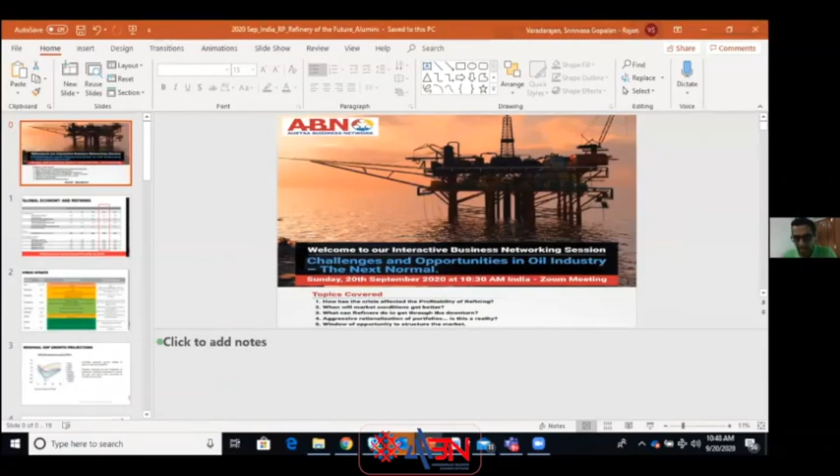Correct. Okay, first of all, thank you very much. In fact, very kind words, Gopi, and I never thought I would be introduced like this, because when I gave my profile, there are many things which got added, and also which I don't know whether I deserve or whatever it is. But I said yes, I will do this because people told me this is an interactive session, in the sense everybody is going to contribute, and being in this industry, I can only let you know what's going on right now, what I know about it, or to the best of our knowledge.

So it's a very limited knowledge sharing from my side, and I want everyone to ask questions during the Q&A and put their views also. This is especially when it comes to the challenges and opportunities, you have to view these things in a larger perspective, in an overall gamut of things. Maybe I have approached this in a very narrow perspective of a technology, but I'm sure Baliga, coming from the industry, expect him to put the operators' or operating units' constraints, their challenges, and where he sees challenges and opportunities. So with that, let me start.

And first of all, thank you very much to all the audience. I never expected, even in my own company, if I call for a meeting, hardly 5% attend the call, especially on a topic like this, because it is talking about the future, and it all depends on how one is going to view the crystal ball. And the crystal ball can be different from individual to individual, but I'm really amazed to see so many people, especially even not connected with the alma mater, like Venkatesan, Kalaimani, Anand, and many others. I'm immensely pleased, they are my good friends in the industry, and I'm extremely pleased that they want to stay connected with the industry, and in particular with the university we all come from. So thank you very much.

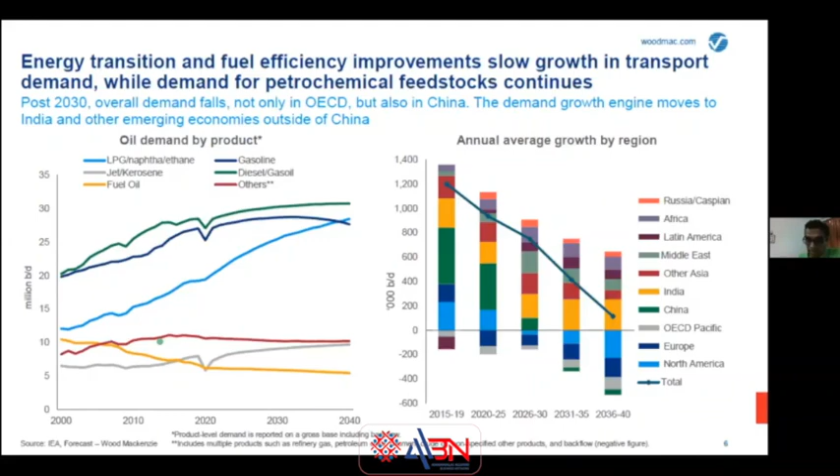There was always an emphasis when the organizers wanted to talk about what is the situation now, how did it affect, how is corona going to play a role. When I looked around the world, I found some consultants speaking that yes, there is an effect which is going to make on the capacity utilization, especially in almost the developing world like India, China, in those countries.

There are going to be a lot of restrictions in capacity utilization, because we are not an industry where we can produce and store. We have limited storage, and India has done a lot more effort on its storage capacities when it comes to crude as well as petroleum products, but still there is an optimum capacity which we can store, beyond which we will only be locking our money in, like putting gold into a locker. So whether we can afford to do it, yes, we can if we are rich, but if you are not rich, you are not going to buy gold and put it in the locker.

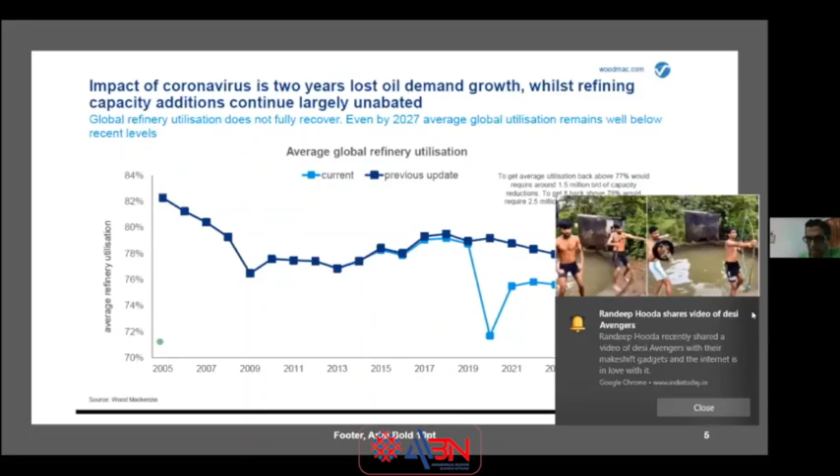Similarly, with the same analogy, the capacities of the refineries have to be restricted, and it is going to be restricted. It is going to be, in the future also, not as efficient as it used to be in the previous years, like 80% or 85%.

You all know, most probably in the refining industry, if the capacity utilization is less than 90%, we are not going to even make break even, because for both our products and the crude, we have to put a lot more money.

Just to quote one of my previous experiences, when I used to work for the public sector in India, my director of finance used to say, you guys can shut down the refinery, I can make money by buying crude and selling and making products by trading. So that is the situation, honestly, guys.

Maybe it is very difficult for engineers to digest that type of statement. When I used to be a young engineer, I used to challenge him on why it is so. But it is a fact, because a lot more money is available in trading, in hedging, in taking calculated risks. And from a technology or engineer's perspective, I feel if the refiners cannot use their capacity to the full extent, it's very difficult for them to make money.

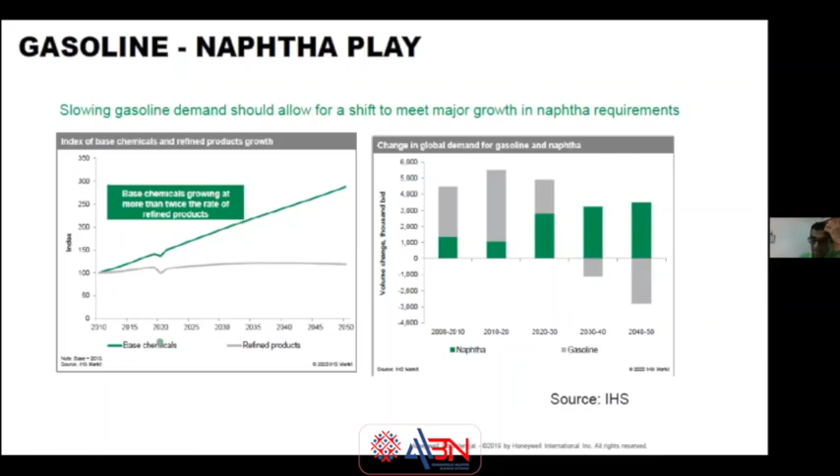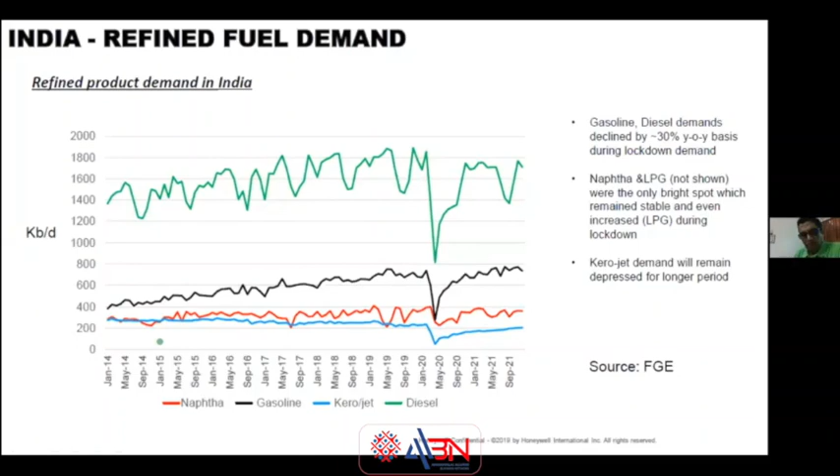And again, there can be seasonal fluctuations and changes in demand, especially for diesel, which is the driving force in most of the refining today. Next comes kero-jet, which is likely to get to normal levels only by next year, not immediately. So the recovery path, especially for a key product like diesel, is going to take a little bit of time, and this is what we expect to happen in the next few months.

If you look at the capacity, as I mentioned, for a good refinery it's always better to be above 100%, because then the profits or margins can really go up, since energy is one of the main requirements in the refining business. If you operate at low capacities, your per capita energy cost is going to be high. So operating at higher capacities is always better, and that's why we always push our refineries to maximum capacity.

But that took a big hit. Capacity utilization came down as low as 70% during the COVID situation, especially immediately after the lockdown. Because we also had very high inventory of products, we could not sustain continuous production in the refining industry, and it took a big hit. In fact, many refineries went on shutdown, except a few, and then slowly recovered. I think currently most of them, on average, are at about 80-85% capacity utilization, including the big private sector refineries like Reliance, Nayara, and others.

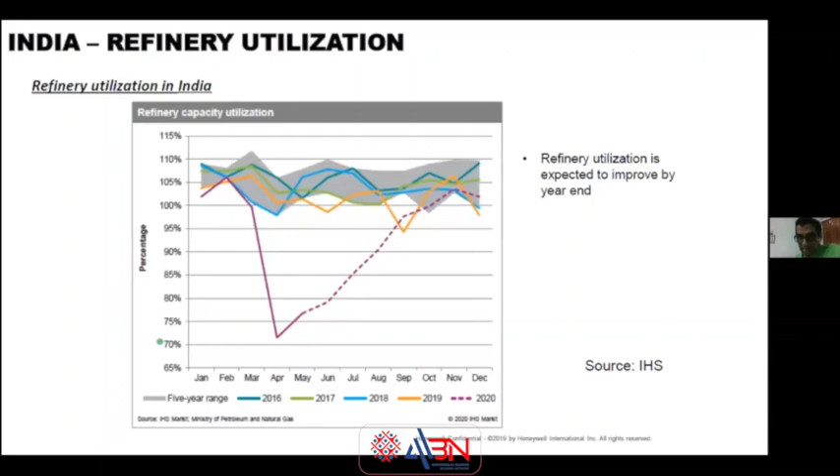So on an average, we are about 80-85% utilization, but still a long way to go. It's not enough for us to make the money we would like to see.

Here's the trend on the spread. For most friends in the industry or from other industries, spread is a common traders' terminology—that is, what is the margin or money one is going to make between producing certain products, especially in refining. It's mostly a traders' terminology, the spread or the crack, as they call it.

For most refiners, the diesel crack is very, very critical. If the diesel crack is not high, then the profitability of operating the refinery will not be that good. So we always face constraints on the cracks, because in 2014 the diesel crack used to be 18, 20 like that.

When it gradually came down, COVID brought nearly a negative crack in some refineries, and on average it came to $3. Just imagine, from $20 to $3—it's a very big drop, and the industry was suffering as to how they can make this up.

It continues to be a challenge for the industry. Because of this trend, and also because demand is coming down, the industry has to look into new avenues to make themselves more economical, because it cannot sustain on the previous cracks.

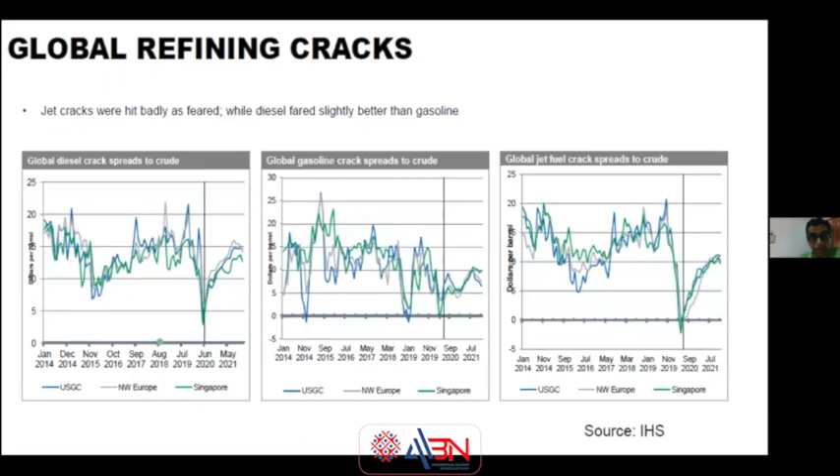Now, I don't know from a timing perspective—maybe I'm taking too much time—so I'll quickly pass through some of the petrochemical demands. Petrochemicals can be classified as aromatics-based or olefin-based, because those are the building blocks for the various petrochemicals that have to be manufactured.

If you look at paraxylene especially, which is one of the products most refiners or petrochemical companies make, the growth rate shown in red is strong—about 6% for a country like India—whereas production capacity is growing only at 2%. So when my colleague Rajaraman talks, he'll discuss new technologies and how we can bridge this gap between capacity and the growth or demand that's there.

From a segmental analysis, these are all going at a very good rate—like 7% for filament, and about 9% growth rate expected for resins. So this is very healthy demand, especially in a country like India, and there are a lot of opportunities here when it comes to paraxylene.

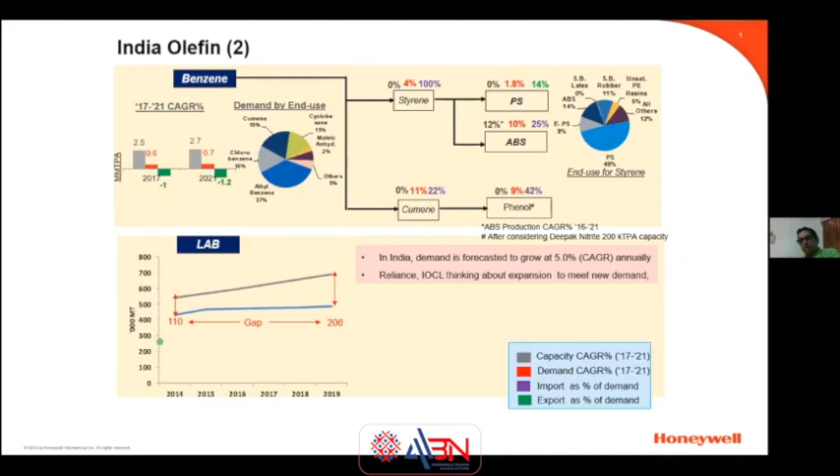Going further, there is some requirement for butadiene as well, and its growth is also projected in the range of about 6 to 10%.

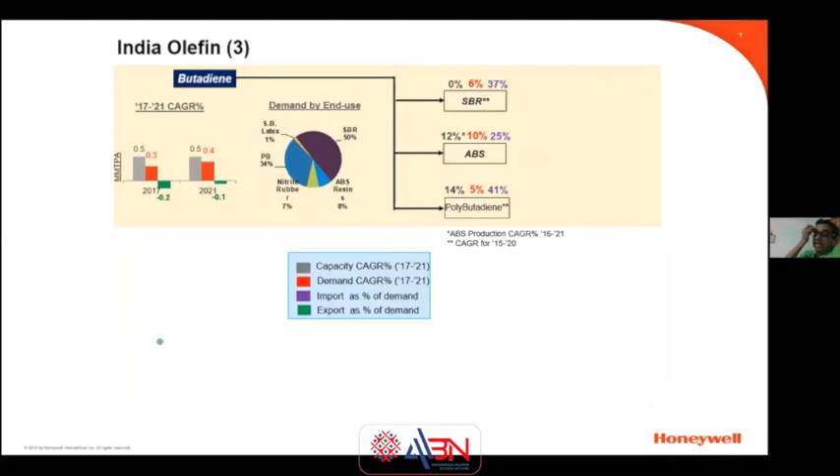In the future, with all this petrochemical growth in India, the question is whether refiners can afford to stay with the conventional products they used to make. The answer is definitely no, unless regional economics permit you, or you have to think of new facilities to be more chemical or petrochemical manufacturers than conventional fuel producers.

In this regard, the industry is moving in 3 steps, like in the computer world where you had a first generation, second generation, third. The economists or investors are thinking of bringing in three phases. One is the first generation, which is the current level.

For example, some refiners have a petrochemical plant like a cracker attached, but they are not converting all the fuels into chemicals. They hardly do - 5% in some places, 10% in others, but it can easily go to 20% with units like FCC producing more propylene or olefins rather than just diesel. Even today, the best highly integrated refinery can make about 10 to 15%.

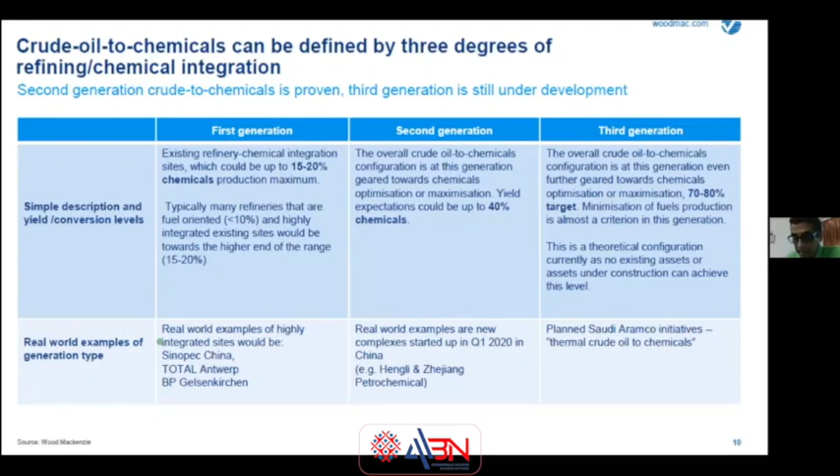In that refinery, most of the fuels will be converted into petrochemical products. The industry is also thinking that even 40% may not be adequate, so we may have to go to 80% level, and that is what majors like Aramco and others are planning - to take the refinery from conventional fuel producers to chemical producers.

So this is the flow sheet of how refineries are likely to change. It's not going to be the conventional crude unit followed by desulfurizers, hydrocrackers, and FCC units - it's going to be a lot more extensive. When you need all the hydrocarbons converted into petrochemical products, you need to invest more in units to make aromatics and also olefins.

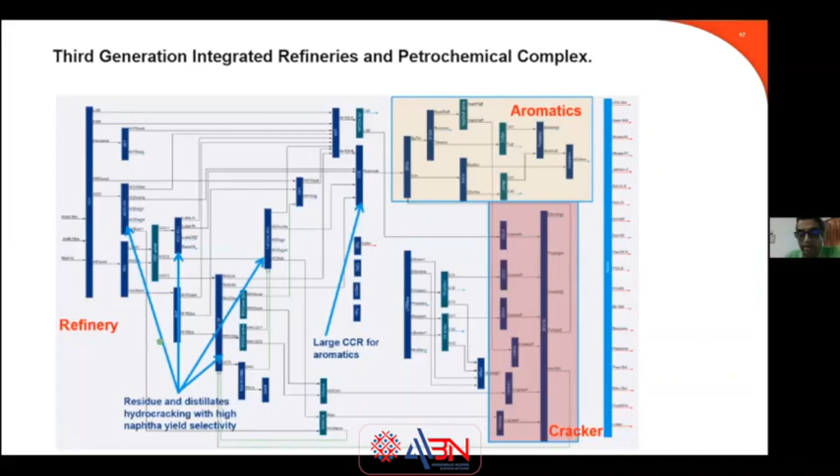So the product slates in the refineries have to go up much differently than what it is now. So how do we do this? Can only new refineries start with this? My view, or the industry view, is not that, but unfortunately in India this has not taken up much, as it is very well demonstrated in other places like Thailand, the Far East, and other countries. 30 years ago, I know one of my CEOs very much insisted on the Manali industry belt, for example, but unfortunately those things have not gone through.

Sorry about this disruption. I think you can switch your windows, sir. Yeah.

I want to remember Mr. V.R. Deenadayalu, who was the chairman of MRL. He wanted to bring in the concept of the Manali Industrial Belt, where you share the synergies between the industry. More of this is going to come in the industry, and I want the industry to take a lead in making the synergies available and convert the refineries into more of petrochemical complexes rather than just be refineries.

Maybe I will have, this is a good time. Maybe I'm talking too much. That is why there is a natural break, and I can give it to my colleague who will talk mostly about the new processes or new technologies available to improve the refineries' profitability. How about that?

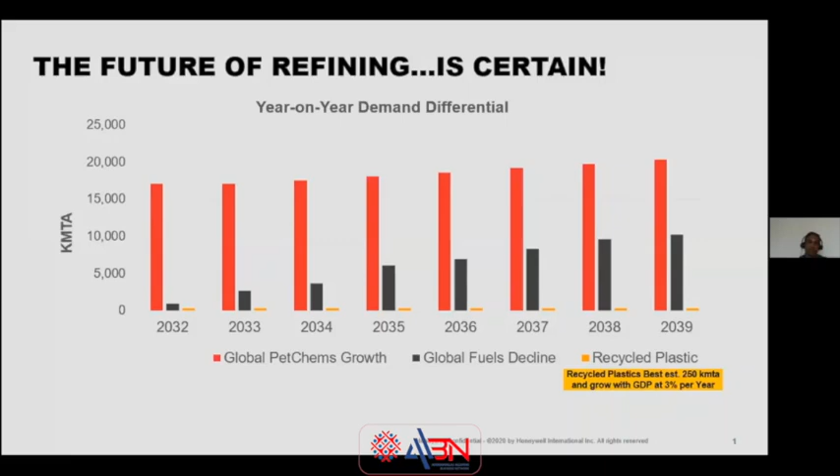Earlier, Mr. Rajan pointed out the first generation, second generation, third generation capability. I'm touching upon that in a pictorial form. Previous refineries concentrated mainly on transportation fuels, making gasoline, diesel, and jet, with petrochemical complexes adjacent to refineries as a kind of separate industry. As the petrochemicals industry grew and pressure on margins increased, nowadays people talk about refinery and petrochemical complex integration, which is happening to a small extent, with some shift towards gasoline or diesel shifting to petrochemicals, with new complexes and FCC units making higher propylene.

If you look at yesteryear's refineries, they hardly made any petrochemicals. Today, even the best integrated petrochemical units don't have more than 10 or 15% petrochemical portfolio compared to what is actually needed. In the future, we expect people to move closer to zero fuels, driven also by increasing environmental pressures, and people will look for higher capital efficiency than was achieved before. These are the changing trends from first generation to second generation to third generation. Let's see how technology plays a major role in each development, and how we can monetize existing assets while moving through the various stages of development.

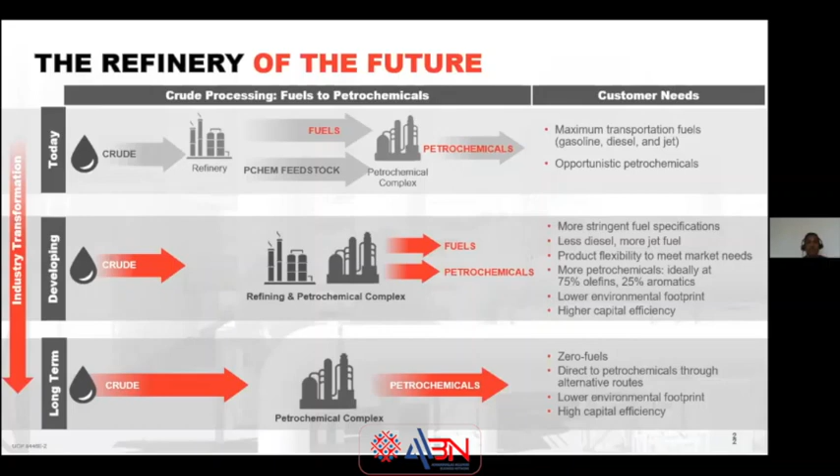Now, the refinery of the future has to be flexible, especially with respect to shifting between gasoline and diesel. There's no way a refinery can simply be said to maximize diesel or maximize gasoline. It has to have the capability to meet changing product mix and changing feedstock preparation for downstream petrochemicals. Integration with petrochemicals is a given, no longer optional for the refinery. As we know, even on a Sunday with more than 143 participants connected from home, that shows the future direction. The refinery will move towards a lot of digitization, advanced technologies, advanced monitoring, remote monitoring, etc. All these things will be the future, if you really want to maximize and monetize every hydrocarbon molecule coming in.

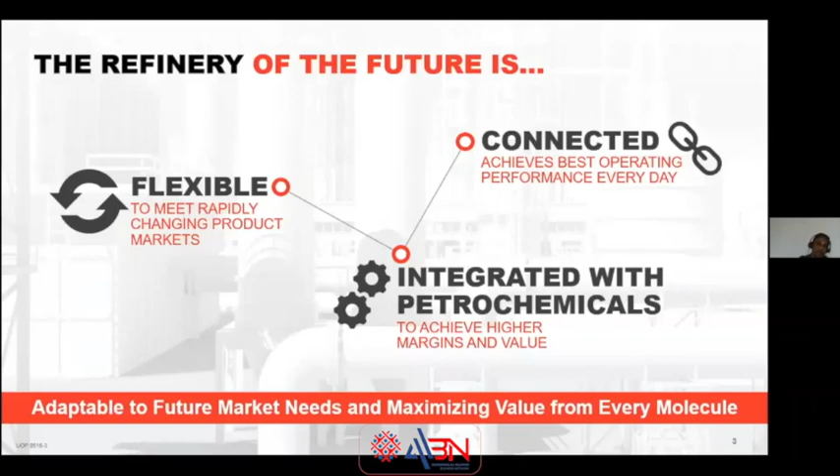Now, let us take through the existing assets and how one can monetize it. This is a simple refinery generally people have, and there are certain changes to some of these configurations could be there as per the existing refineries.

This is a generic flow diagram where people used to have a bottom of the conversion, mostly a delayed coking unit. There will be an FCC. Some places there will be a hydrocracker, depending on that. I have chosen here to represent the FCC, as already in India we started moving towards making propylene from FCC to meet the growing propylene demand. Now, naphtha complexes are there, mostly making now towards the Euro 5 gasoline and other specifications.

Now, what is going to happen in future is we can add some of these technologies, what I am showing now coming up on the screen. I will briefly describe the purposes of it, not in greater detail, in view of the time, as well as to have the entire audience covered.

Now, let us see the kerocracking, which is a low pressure cracking of the kerosene stream, converting it to valuable naphtha for either the naphtha complex or future petrochemical purposes, and also to make more LPG. Similarly, hydrocracking of the diesel is going to come. These two, if you really see, are aimed towards shrinking the fuel component, either the gasoline or the diesel.

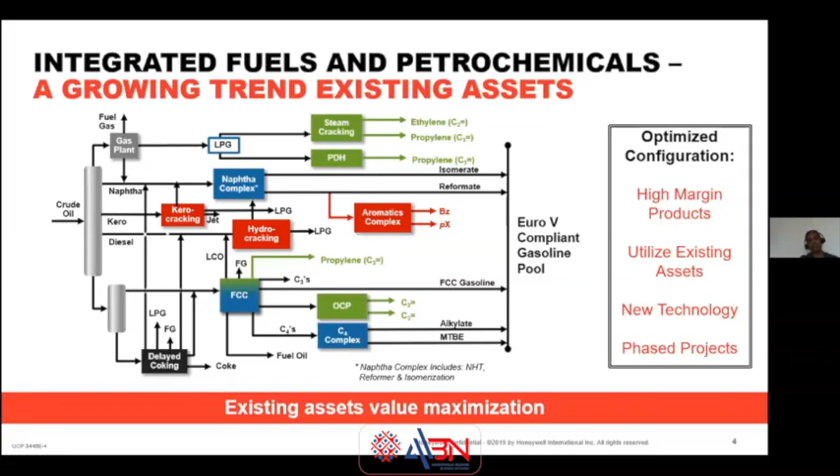Now let me move from the only pure fuels. This has helped create some high margins, and we can implement all these things in a phased manner, so that capital efficiency can be achieved by putting a small addition, either the OCP technology or using small hydrocracking to maximize the naphtha, LPG, diesel, or jets. And of course, the PDH and steam cracking has got a larger investment compared to the others.

Now let us go to the integrated complexes that are coming in. If you see here, we talk about the same complexes, but with some bottom of the barrel upgradations expected to come, either the Uniflex or other technologies that help in maximizing the conversion of the bottom of the barrel. Because now the heavy crude to light crude differential has come down, but there could be future incentive to process heavy crude. With crude demand also going to narrow down with utilization of fuels generation or petrochemicals generation, the bottom of the barrel conversions one has to evaluate. But these are the things likely to add as a kind of total complex, converting everything to naphtha or suitable for going to a cracker complex.

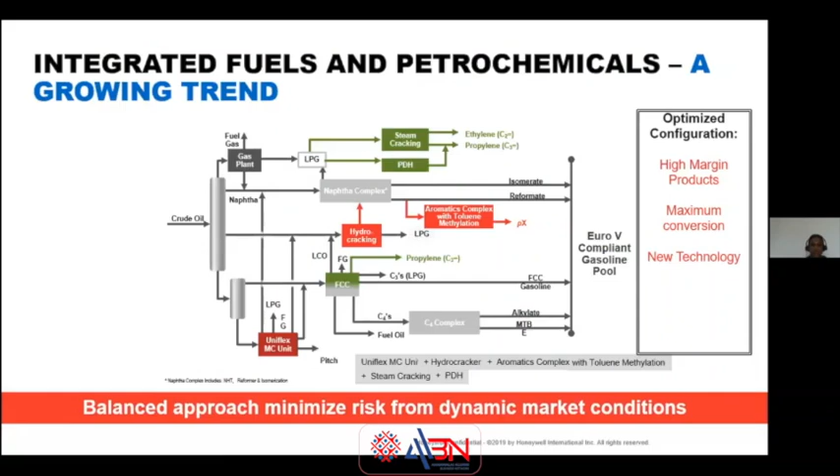Now there is an additional technology available in the aromatics complex, called toluene methylation, converting toluene further to PX and maximizing PX production. So the entire complex, as you see in the previous slides, this is maximizing the olefins and the aromatics.

Now this is what is going to be the total elimination of fuels in future, as you see, and every complex's molecules have been converted to maximize the petrochemical feedstock or the building blocks.

I will just take you to the topmost portion of the naphtha, where the MaxEne unit has been put. The MaxEne unit is essentially a separation of the naphtha with respect to its hydrocarbon nature. Paraffins are basically separated, and the normal paraffins, which are a very good component for the steam cracker to crack, are preferentially sent to the steam cracker to maximize the yield of ethylene and propylene. Similarly, MaxEne rejects, which is the concentration of aromatics, will be a very good feedstock for the platforming unit, which can go for aromatics generation in downstream aromatics complexes.

And whatever be the gas plant, which is a combined saturation gas plant, separates the C3 and C4s, they can go to an on-purpose propylene unit, called the propylene dehydrogenation unit, to maximize propylene.

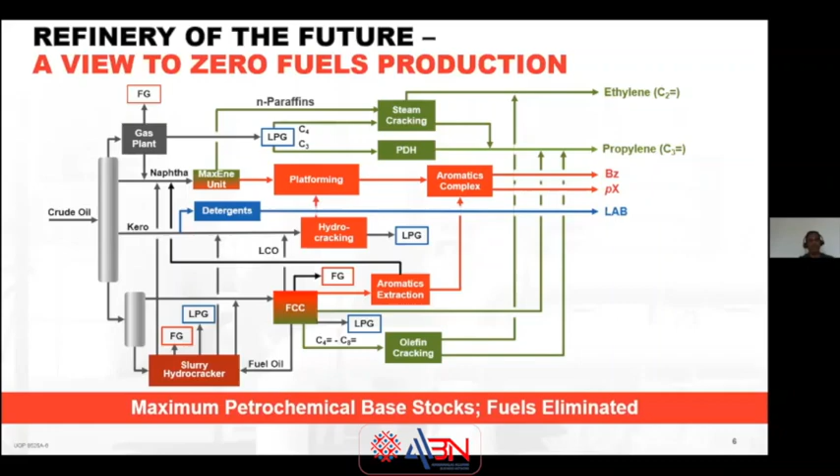Now we talked about the various elements of the technology and how this technology is also going to be made in a kind of a sustainable balancing act. If you look at this diagram, moving from the climatic concern on the right hand side, we are already seeing fuel efficiency needed because of electric vehicles and other things. The pressures on fuels, the renewables have started replacing some fossil fuels. And because of other technologies like car pooling with Uber and Ola, there is a lower fuel growth expected, which is going to put pressure on fuel growth.

If you turn anti-clockwise, everybody expects GDP to increase, and that is what is expected to grow. With that, the standard of living is going to go up, and use of petrochemicals or plastic usage is going to grow. Then there is a rising demand for petrochemicals, which makes us think the petrochemicals demand is going to push, and we take the shrinkage of fuels as discussed in our first slide, and utilize that to capture value by moving to petrochemicals.

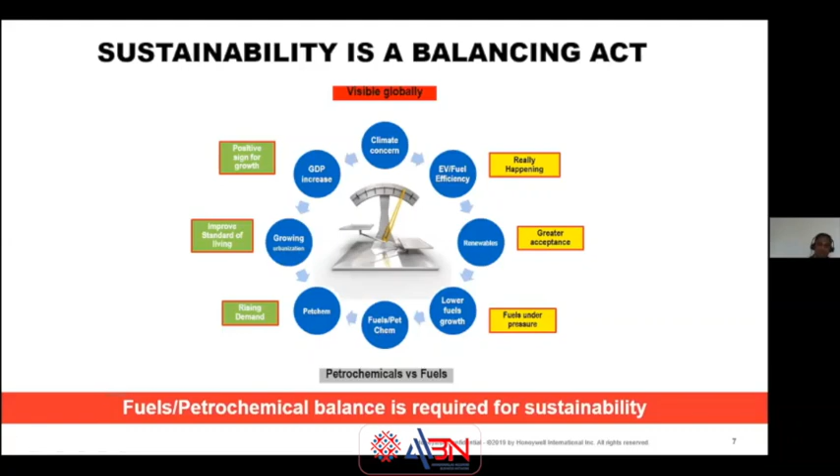Now this is the third and ultimate generation being planned with all the elements of petrochemicals downstream. As you can see, LLDPE, polypropylene, butadiene, PX and benzene, and all kinds of complex situations have been added here. This is the final configuration being worked out with the customers. It is on the drawing table, and hopefully this is what some companies will start moving on in the coming years.

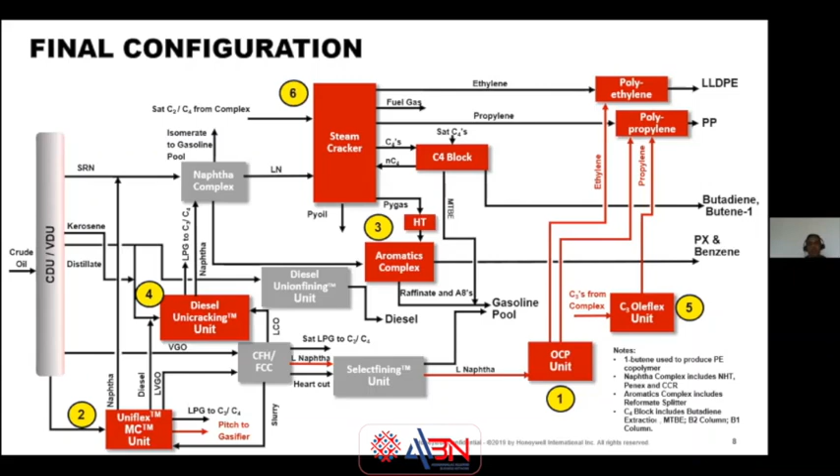Some of the units we touched upon can be added even today, and these are all going to be evergreen even going forward into the future. So when somebody is moving from, let's say, second generation to third generation, we could still utilize some of these technologies, and nothing will become redundant. The only thing is we can phase out our investment.

Now I'm just slightly shifting gears because this is also a very important aspect - how future technology has to be adopted, and what we call the 6 efficiency metrics for the business to go forward. Earlier, we were selecting technologies on different parameters, depending on energy efficiency, pollution control, capital efficiency, usage or production of hydrogen. Now, the future adoption or alignment of these technologies for business has to follow all these things.

Every molecule of hydrocarbon has to be properly utilized, and routed in the maximum possible way. Utilization of utilities is going to be evaluated with respect to all the other parameters indicated here. Water usage is going to be a concern as we go, both from generation of effluent water as well as availability of fresh water.

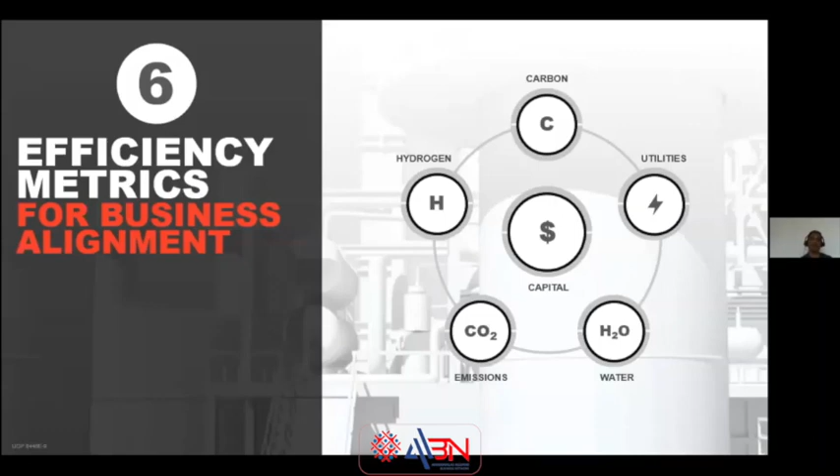And obviously, I don't have to talk about CO2 emissions, which is going to have a big pressure, and the hydrogen economy, which involves both usage and generation from the utilization of hydrocarbons - we have to take that into account. And obviously, everything comes with capital efficiency - the project has to be bankable, and capital efficiency is very critical nowadays. So UOP suggests this kind of E6 benchmark. Essentially, we now adopt this E6 framework of efficiencies so that we are aligned with the future concerns of business alignment.

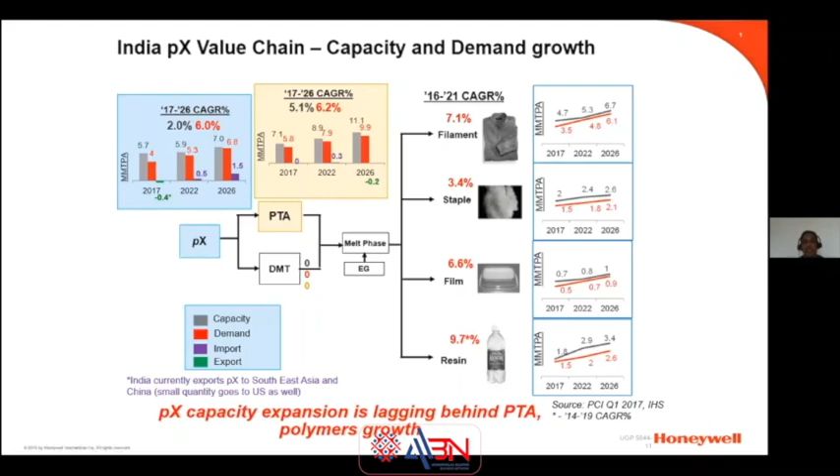Next I'm talking about aromatics, and I'll take the major two building blocks on the olefins, ethylene and propylene.

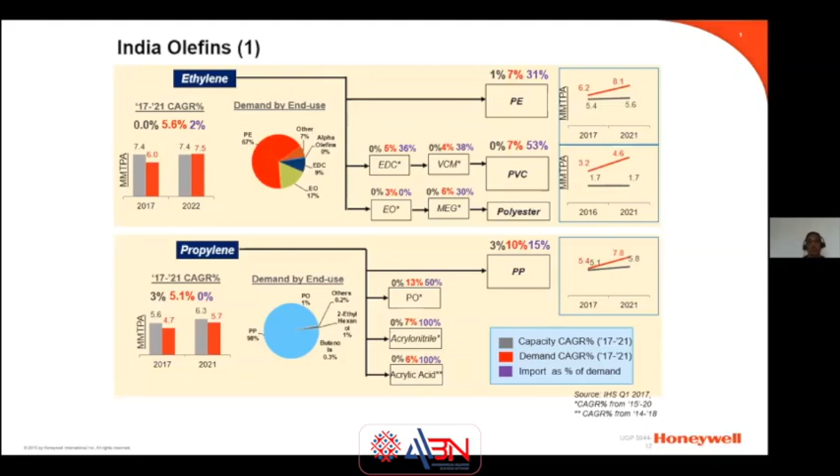Maybe the scale may be less, but with the current growth in the chemical industry, we think downstream, especially niche petrochemicals, will have a major role to play, and there will be demand.

With that, I would like to conclude that yes, we have a lot of challenges in the refining industry with shrinkage of demand, changing policies, and environmental concerns. But as always, the industry has been resilient, taking on the challenges and moving towards petrochemicals. We will become the standard of the future.

Definitely some concepts like energy efficiencies and molecule management are already being thought about. The existing assets could be monetized. It is not that they need to be wasted - we can do a kind of stage-wise or step-wise investment.

All these technologies and innovations are already taking place, and they are nothing new. The adoption has been the differentiator. With that, I have come to the end of my conclusion on the discussion of technology adoption.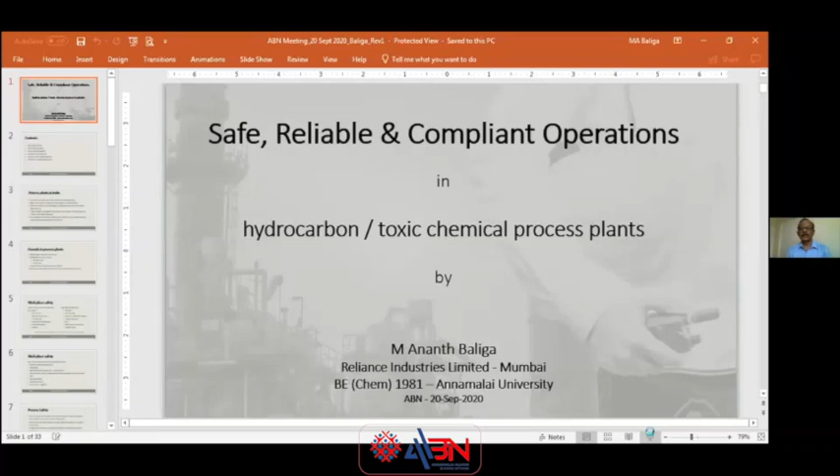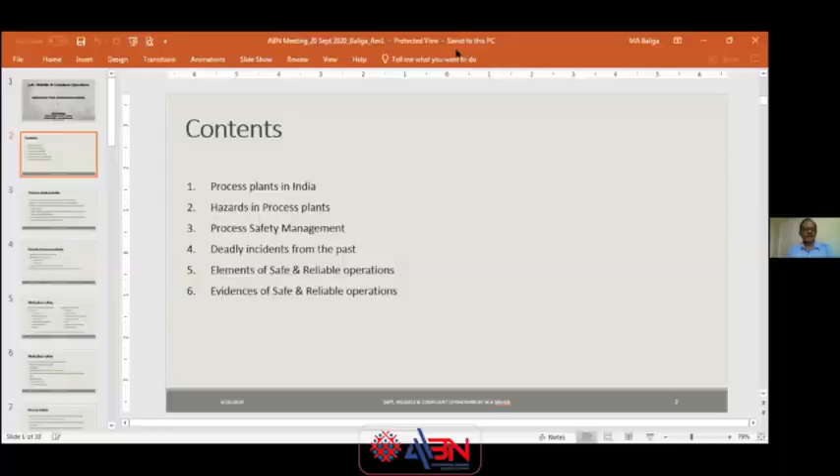So actually, yeah, is it moving on? Is the slide moving? I come to the content slide. It's still on view mode. We can change it - shall I? No, let me make one try, otherwise I'll give it over to you. Sure. Is it okay now? If you can kindly make it full screen mode. The next, yeah, perfect.

Yeah, okay. So we are going to talk about just an overview. You already got a full dose of the process plants in India, the economics, the scenarios, and its contribution to India's economy, etc. We are going to focus more on items 2 to 6: various hazards in process plants, various issues related to process safety management. We are going to see some deadly incidents from the past, and then elements of safe and reliable operations.

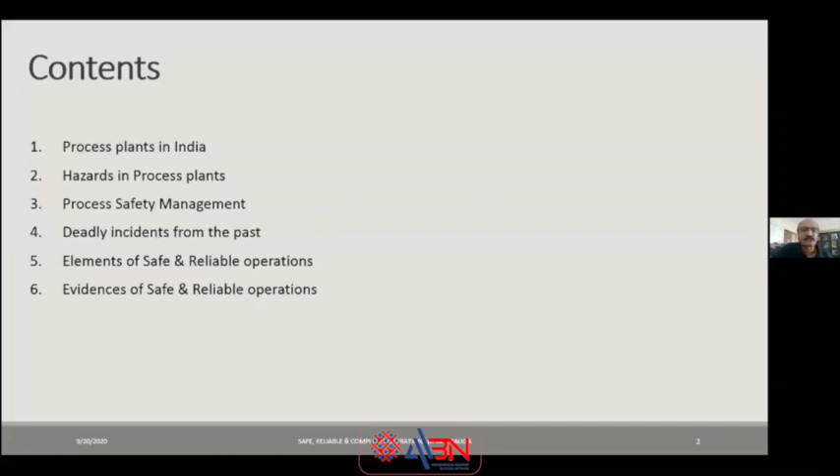And then how do we know we do that? Varda and Raja touched upon it. In India today, I believe 30% of the GDP comes from manufacturing. The balance comes from agriculture and service sectors, etc. Out of the 30%, one quarter is coming from process industries. Out of the manufacturing, various other mechanical, electrical, manufacturing areas, civil—if you go into that, 25% comes from process industry.

As chemical engineers, or rather any engineer, we have a lot of responsibility to maintain the assets very, very safely, operate it safely and reliably, so that they give the return on investment in a more responsible and reliable manner.

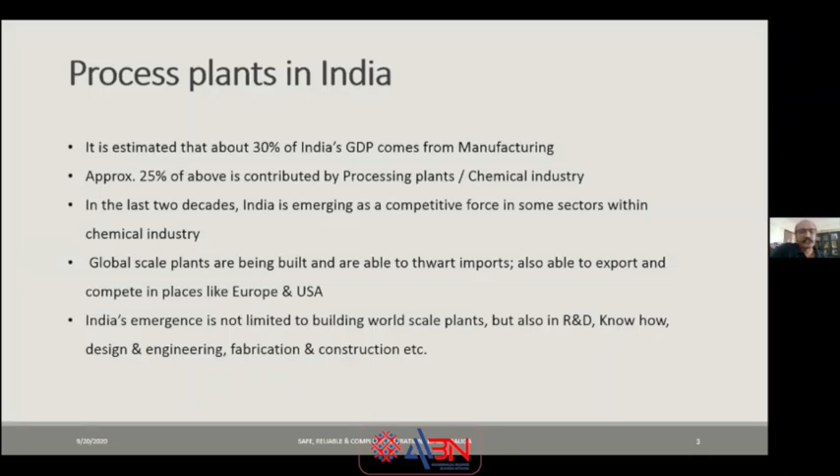So we know that earlier India used to have very small industries. Slowly, in the last two decades, a lot of large scale, global scale, world scale plants are coming up. As a result, the responsibility to operate those plants safely and reliably is also increasing. If there is a small plant, the inventories of toxic and hazardous chemicals are less, and the nature of undesirable impacts on safety and reliability were that much limited. Population also has grown phenomenally, and there are a lot of communities living around large plants. So it's very important that we have a mindset for operating the plant safely and reliably.

When you talk about hazards in process plants, basically there are two types of hazards we talk about. I am going to give a lot of emphasis here on safety, although there is also relevant emphasis on the environment, which is actually embedded or subsumed into the process safety aspect. So I talk about two safety aspects here: one is workplace safety, another is process safety.

Workplace safety deals with several types of injuries, and it is by and large confined to the local plant people—the external community or outsiders generally don't come to know about it. There may be day in and out some workplace safety or personal safety incidents, and most outsiders don't know. Only the people inside the plant know about it, and it is treated as such, unless it's very serious in nature. Whereas a process safety incident, if it happens, you cannot hide it.

It is actually going to be known—even the owners sometimes come to know an incident happened in his plant from TV these days, and not from his own people, because those people are so engaged in incident management at that time that they won't be able to escalate and inform the relevant people. So process safety incidents are actually deadly.

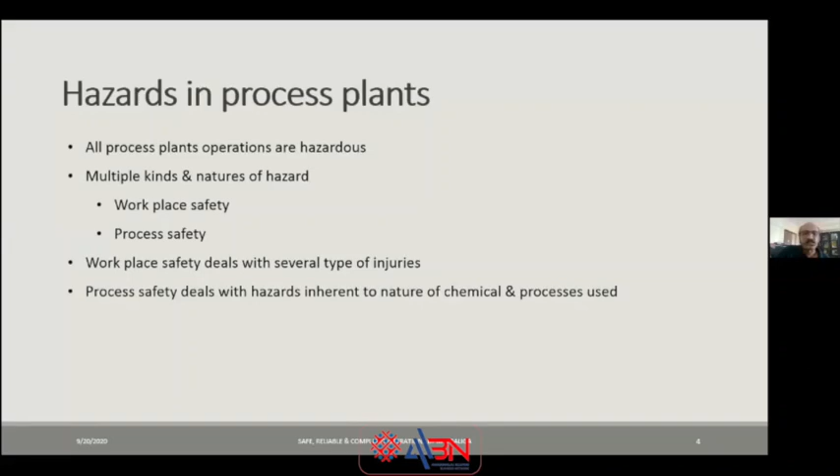Workplace safety has got simpler impacts, usually first aid cases, plenty of those. Medical treatment cases, lost work cases, permanently disabling injuries. As severity increases, you have occupational injuries where people don't know they are injured, but over a period of time they come to know they have been getting injured for several years. And of course, fatalities—slip and fall from height, forklift incidents, crane toppling, EOT crane rope sling getting cut and falling, burns due to exposure to electrical flashovers, fires, and steam and hot surfaces.

They are all, along with people transport—there are a lot of people transport incidents in the industry. We call them all workplace safety.

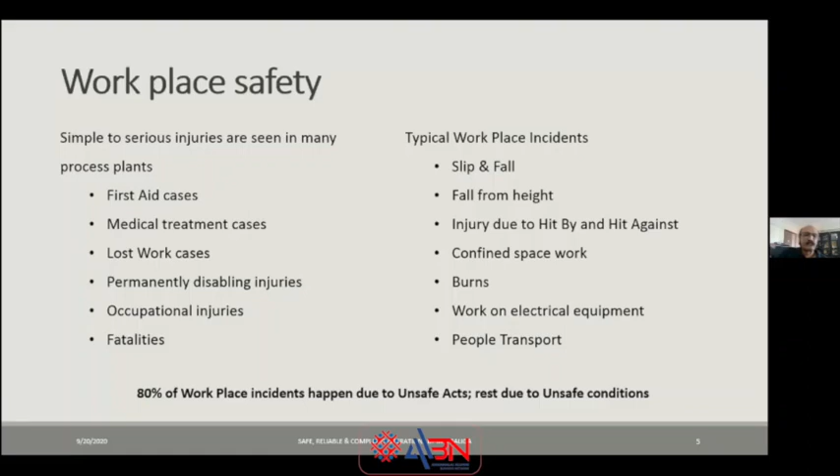80% of workplace safety incidents happen due to unsafe acts. An unsafe act is an act done by an operator or a person which is not as per the standard procedure. We assume that the procedure is properly developed, taking into consideration all the hazards and risks involved, covering the required mitigation measures and checkpoints, so that if the procedure is followed, nothing should go wrong. So most unsafe acts, and thus 80% of injuries, come from deviation from that procedure.

So workplace safety is usually covered with various regulations and habits. PPE is one of the most important things—personal protective equipment like helmet, goggles, gloves, and safety shoes, and inherently fire retardant suits, etc. In boilers and the electrical area, you have special PPE. And proper planning—PPE is a standard thing.

It is actually visible about how you care about workplace safety. It's visible, and you can immediately make a judgment whether people are working safely or not by looking at the way they handle PPE and use it.

Job planning is one which is not visible, but it requires to be seen. Only people in the plant know it. A very good job planning will reduce workplace safety incidents enormously. Operating procedures, use of proper tools, and unsafe acts I already talked about.

Along with preparing job operating procedures and job planning, you also do a proper risk assessment. If you don't do it, your job planning and operating procedures are expected to not be good enough. Job safety analysis and such things are done, and then you identify what control measures you want to put in place, and you do that.

Above all, there's operating discipline. Operating discipline is a very, very important thing for having a very safe workplace. Operating discipline issues include bypassing a procedure, doing unsafe acts, not wearing PPEs, etc.

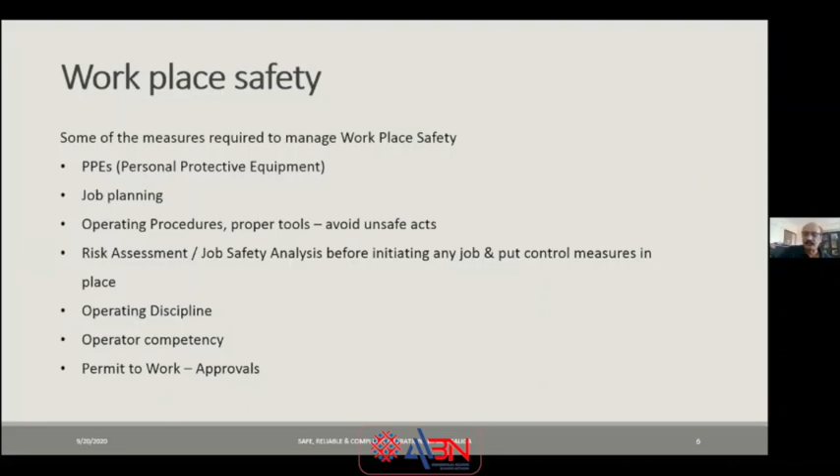And then ultimately a protocol where everything is controlled through a proper organizational approval process, permit to work. So these are the most important steps involved in workplace safety management.

When you come to process safety, it's actually a serious damage that happens - damage to plant, equipment, environment, and injuries, including very serious injuries to people and fatalities can happen. And most of the time, it also overspills beyond the boundaries of your plant, into your neighboring community.

If you look at Bhopal and Vizag that happened recently - I'll come to that later - you will find that their own people were not affected. Within Bhopal Union Carbide or the Vizag LG complex, hardly anybody inside got injured, and it was never news. What was in the news was people who got injured outside, innocent people who got affected very badly, and there's a tremendous consequence - their families and their future is affected.

These are all process safety incidents, which are very, very serious, and they come from inherent processes rather than people behavior.

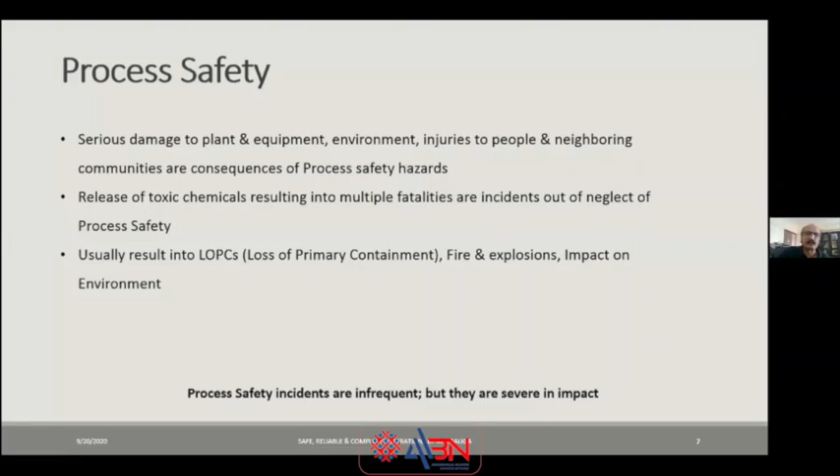Release of toxic chemicals, we talked about it. Process safety incidents usually involve loss of primary containment, fire, explosion, even environmental incidents, release of H2S and other toxic materials, like what happened in Bhopal, etc. They are all process safety incidents. They are very infrequent, but they are deadly.

We'll quickly go through a few deadly incidents just to remind us what we mean by process safety. All these incidents I am showing you now are all very good examples. There are actually plenty, but I thought what is important, I brought it here.

One is actually Piper Alpha. No refinery or petrochemical plant engineer will be there, I guess, who doesn't know what went wrong in Piper Alpha. Piper Alpha is an offshore platform, I think owned by Occidental Petroleum, and it was in the North Sea of UK, in which something went wrong and almost 167 people - almost all, 99% of the people - died. I think hardly about 3 or 4 people survived.

Everybody on the platform who were working, and who were there on the 15-day vacation, the shift rotation people who were living in their quarters, they also died. So the entire platform got gutted. Nearly $3.5 billion in today's terms equivalent was the loss to the company. Nearly 10% of UK's oil production got cut.

So what went wrong here is basically very simple. Various things went wrong, but actually they were all cumulative. What happened is the culture was there, but it got eroded, I would say, in my analysis, and that is the thing. You can't pinpoint that on a particular day this fellow did this, because of which this happened - you can't say that. I think it happened because over a period of time, the leadership was not focusing on safety, environment, and the rigor required to run the platform very safely. They slowly started thinking that everything is safe and the boys are there, they will take care of it. That kind of attitude was actually the most important thing.

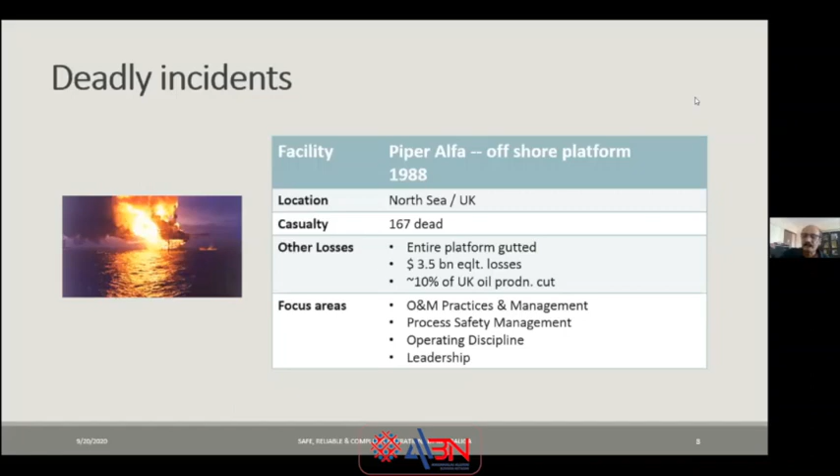The result: in the night, when the running condensate pump tripped, the night shift people just thought they could start the B pump, and then they started the second pump, and a lot of gas and condensate gushed out, and then it found a source of ignition, and the whole thing went off. So look at the Buncefield oil incident.

This also happened in UK. It's a tank farm which has about 40-45 tanks, and receives oil, gasoline and diesel from two different standalone refineries, and stores oil, diesel and gasoline, and fills the ships that come on shore. Here also, I would say the operating discipline and culture, which is actually a leadership role, has got eroded.

Day-to-day rigor in safe and reliable operations was lost. Operating practices and management, process safety focus were lost. Risk assessment and management was lost.

What happened here is known in the same way: the day shift people handed over the shift to the night shift people, and said gasoline is getting filled in such and such tank, please take care of it, its level gauge is not working. And they said, based on our assessment, the tank will get filled up by night 12 o'clock, so you better stop filling at 11 and then give change over to the tank.

Night shift people re-estimated, and said it would get filled at 12 o'clock. But there was a slight element of doubt in their minds about which refinery was filling gasoline through which line into which tank. So they had some doubts and were not sure, and they were not verifying things properly.

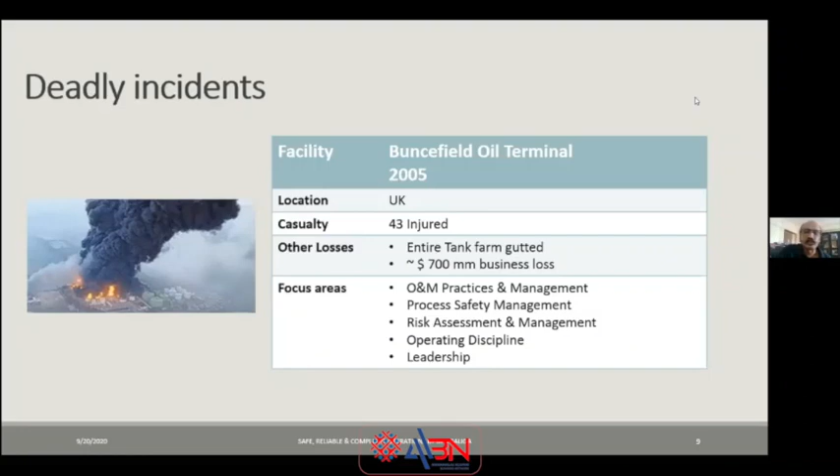With the result, the tank actually started overflowing at night 10 o'clock. They never knew. Around 11:30, when they wanted to switch over the tank, they went to the field and found the tank already overflowing with a huge vapor cloud. It found a source of ignition, and the whole tank farm went off. Nearly 43 people got injured because they could run away before this happened, but the entire tank farm went away and the company went out of business.

BP Texas Refinery in 2005, a similar case of culture, operating discipline, operating practices, and its rigor and strict compliance to it. From top to bottom, from the top management to the bottommost operator, there was a complete lack of seriousness in the running, a lot of casualness.

This particular incident happened during a startup. We all know startup is more vulnerable to safety disasters or abnormal situations. It's a transient state, so nobody can have very good control on pressures and temperatures. In fact, that is being moved by the panel operator. Flows are being changed, temperatures are being changed, the flows are being pushed. So there is a transient state everywhere, and it requires a tremendous amount of control and discipline to start a plant in a better way.

In this particular case, the night shift actually started the plant. One of the best practices says: don't start a refinery after a big shutdown during night 7 or 8 o'clock. You better wait and start at morning 8 o'clock, once the new fresh shift has come, have a proper look around and then start. That is one of the best practices. You may lose 8 hours of production and some dollars, but it's always safe. But there was a hurry to start production and make those few gallons of diesel earlier.

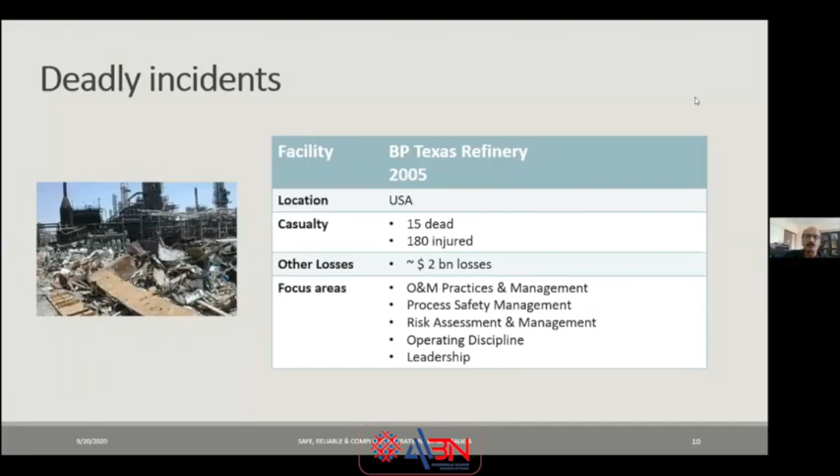On top of that, there were about 150 or 200 laborers in the plant. Usually you don't start a plant with unknown people. You run with the 10 people or 8 people who are there, who know the plant operation. Even maintenance people are asked to stay out, only called in when they want something done. Otherwise, only operation staff are supposed to be there. Whereas these people started the plant with about 120 laborers and contract people in the plant, and then there was a big disaster - Bhopal '84. I don't have to explain what went wrong.

It is one of the deadliest incidents. I think today it ranks as number one. One of the impacts is the company itself has disappeared today.

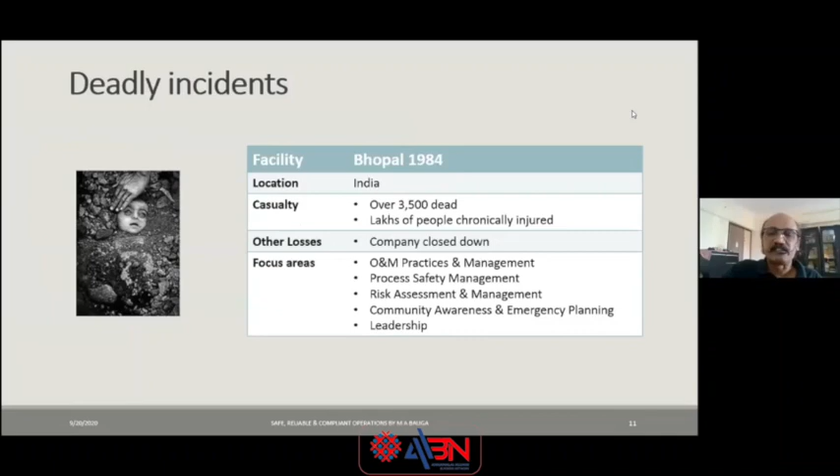And then here again, there are various process safety elements missed, O&M practices missed, community awareness and emergency planning missed, and how can a plant be running without a destruction unit not in service for several months? That means leadership has been sleeping or lethargic.

Ukraine, Chernobyl 1986. This is another case where proper job planning was not done, and people hurried up in order to liquidate an action point. The attitude was, 'at any point I need to close out this action point resting on me, otherwise I will be questioned.' There was a test of a power interruption on the reactors.

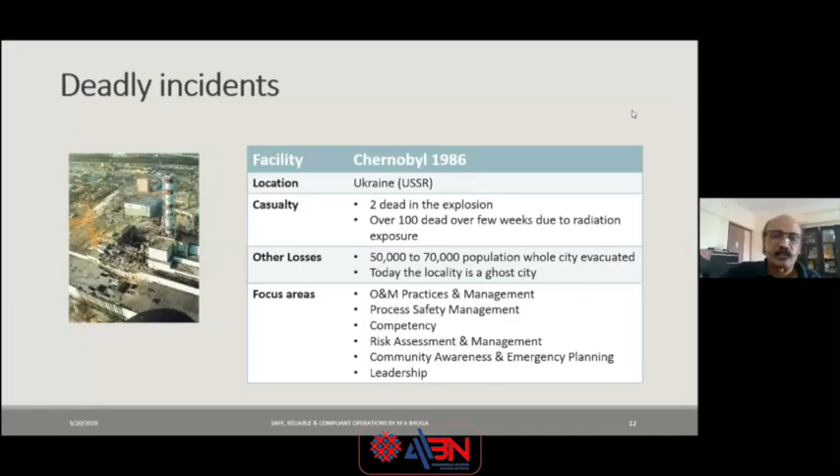They had already done a couple of tests which failed, and this test was more severe - the final test, they called it. They went through a power failure mode through various procedures. They did it through a procedure, but their risk assessment was not adequate, and their technology systems were not good enough. With the result, when they created the power outage, the reactor's utility systems didn't have adequate capacity to cool down the reactor.

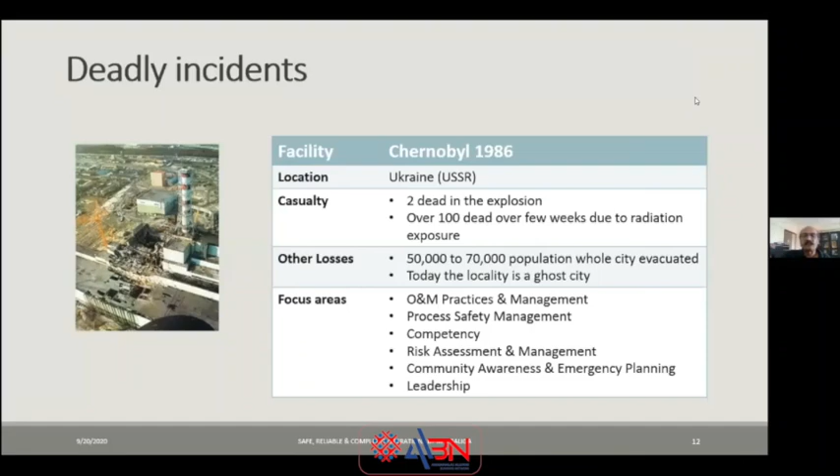And then there was a very serious incident, one of the worst disasters other than Fukushima. I'm coming to Fukushima here, which is actually one of the worst process safety incidents, where the facility design, the locational design, and the emergency scenarios consideration - the hazards have not seen various likely scenarios. What-if analysis was not done properly. As a result, there was an incident, and they had enormous...

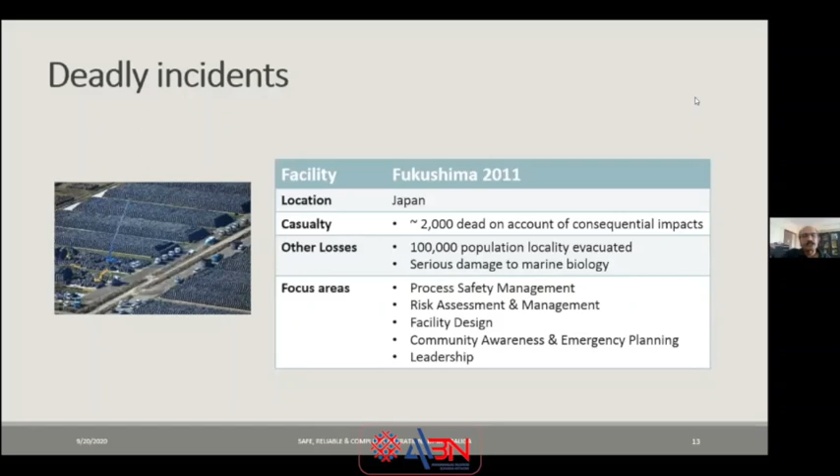Three types of problems in the next 4 to 6 months to 1 year period. How to deal with the radiation fallout, how to deal with contaminated material disposal, and above all, the sea, which got contaminated with the cooling material - how to protect marine life. Of course, the entire city was evacuated, and now today it's a ghost city kind of a thing.

Vizag styrene leak is a very recent phenomenon. It is a mini Bhopal. Here again, various issues - process safety management, risk assessment. I would also add competency is one of the issues here, because today, in that plant, for that matter the whole of India, or even outside India, most people didn't know how deadly styrene is vis-a-vis toxicity.

People always looked at styrene as a fire and explosion hazard. It has never been seen as a toxic hazard like this before. But when you look at the MSDS - material safety data sheet - of styrene from any company today, you will find they say it is a highly toxic material. So what this shows is, even those producing styrene knew it is highly toxic, but it was not in their RAM memory, in their brain, that it is toxic. Everybody - manufacturers, suppliers, traders, handlers - nobody knew it was such a toxic material.

No wonder that in this plant in Vizag, no one knew it was so toxic.

And then they landed up in such a big thing. So competency is an important element in this particular thing, I would say.

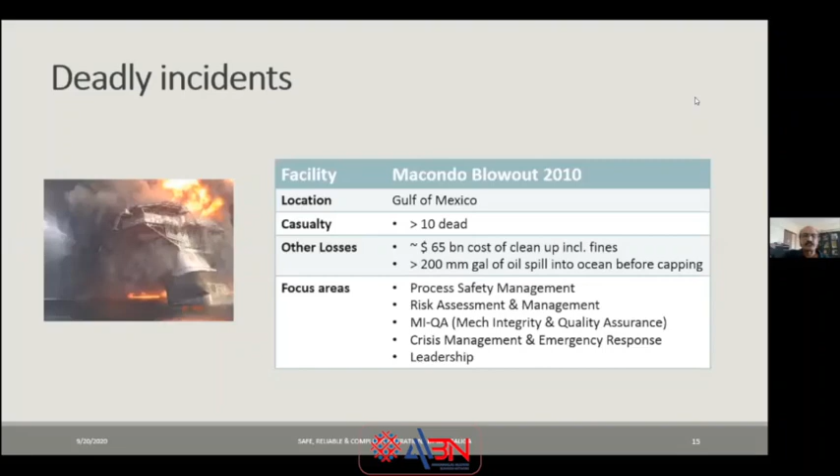So time pressures and production pressures actually overwhelm their safety considerations. So this is all very, very serious. So risk management - we see when you talk about process safety management, we talked about risk management, risk assessment and management, even when we talked about workplace safety incidents, but their consequences are very limited and small in nature.

Maybe somebody gets injured. I'm not saying it is allowed - it is not tolerable, obviously. It's not a single injury. Even a cut is not tolerable in a factory. We don't allow it at all. But process safety is a complete no-go.

And you have to have a stringent risk management program, a process, a protocol system in place. In fact, any large company must have a risk manager, a full-fledged risk manager who is competent in risk management processes.

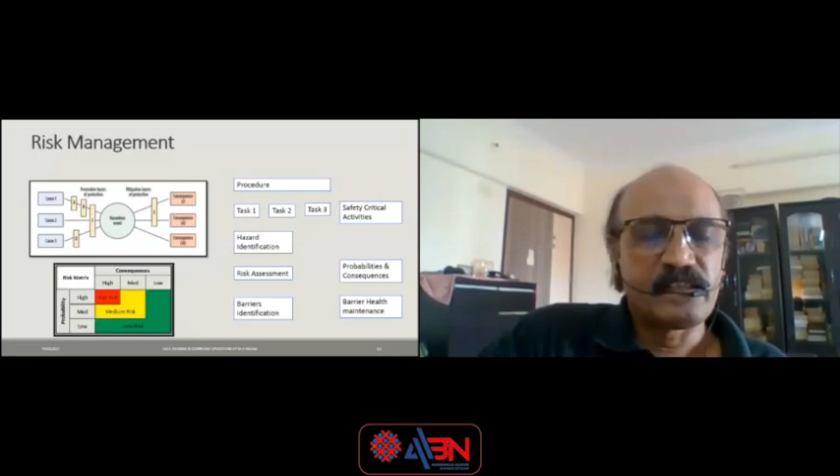Usually, if you go to the world in the knowledgeable industry and talk about risk management, they all talk about financial risks, frauds, and thefts and all that. But we are talking here about the specialized risk management of safety and reliability and hazardous chemical handling risk, safety and operational risks.

You must have a specialist in your company. If you are not a big company, you better join hands together and have a consortium of industries and appoint a consultant and have your factories assessed for various process risks.

And the various risk assessment methodologies are available. People talk about calculated risk. Risk cannot be calculated nor can it be estimated. What you can do is an assessment, and with various technology tools available today, modeling and other things, there are some kind of quantitative and qualitative risk assessments. So quantitativeness is a little bit possible, but that must be done.

And everybody should do a risk assessment, especially if you are handling a very, very hazardous chemical, toxic chemical, and if your inventories are very high. So you go through this risk assessment - it's basically a cause leading to a hazard happening, and then the hazard leading to a consequence.

You identify what are the tasks that you have, identify what are the hazards involved in the tasks, and assess the risk. What is the probability of a hazard happening or the cause happening? What is the consequence of that? And based on that, you identify - if the probability is high and the consequence is high, you have a high risk. If it's medium, you have a medium risk or a low risk.

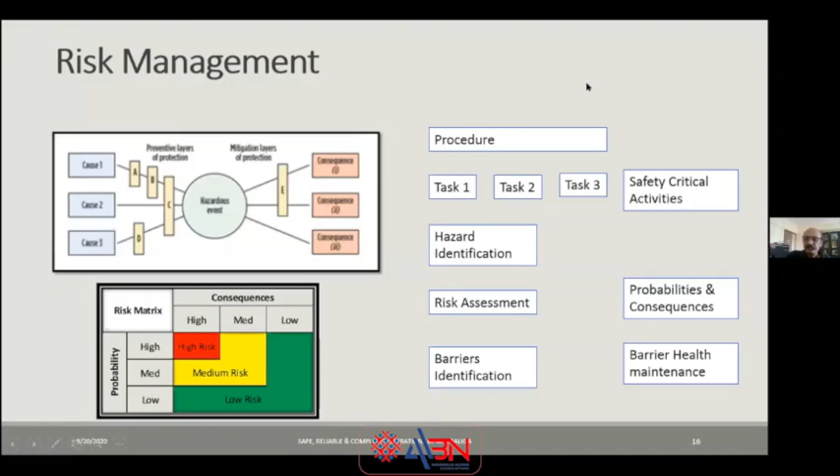So what are the various elements of safe and reliable operation? There are multiple, let me quickly go through that. What is design and construction? I want to go through all the bullets here. I hope the organizers will let you have this presentation. I will only talk about a few here.

Design and construction is very, very important. Plants are designed meeting contemporary codes and standards, and then built as per the specification. And then there is a design basis. The design basis actually considers the end-to-end life cycle of the plant, and the plant is built as per that.

When you do the design basis, you have to consider the entire life cycle, and look at how it impacts operations, construction, raw material supply movement, water flows, effluent streams, communities. Look at shutdown scenarios and temporary shutdowns like COVID. What happens when you restart after such temporary shutdowns, whether your design basis provides for those.

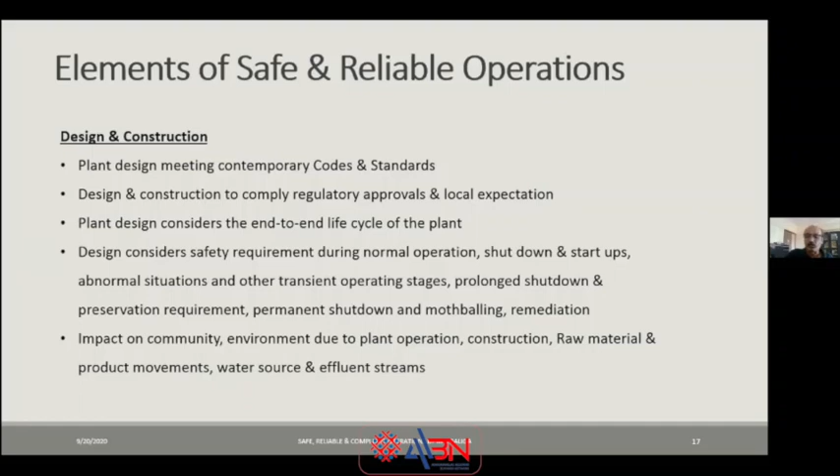Second one is documentation, a very, very important thing. Even large companies, we have found there is some kind of a gap in this measure. For example, how up to date are your plot plans, process flow diagrams, P&IDs, data sheets, vendor manuals. They all must be up to date.

No plant remains idle from day one to the day it ends. There are a lot of changes happening in the plant. Modifications are done, debottlenecking is done. You need to continuously update your P&IDs and keep them up to date.

One is design documents, another is own documents - your SOPs, operating limits, operating manuals, training modules, etc. They have to be up to date, and they should be fit for purpose. Then you need to have policies, standards, procedures and practices. Everything needs to be documented. It's not enough to have a policy just for the sake of ISO 9000.

You should have a policy. Of course, ISO 9000 is one of the best standards, but you need a policy that is understood and practiced, with elements of the policy embedded in your procedures, practices, and checklists.

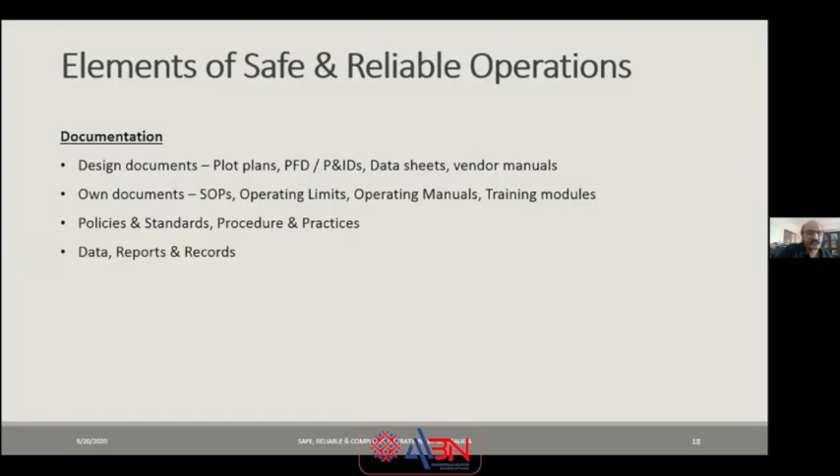Data, reports and records - not the last but not the least. They are very important, especially in today's world of digitization, data and analytics. Your data is very important. How well you maintain your data, what is your data structure - you need to look at it and see that it's all preserved and maintained well.

Coming to training and competency - competency is basically a demonstration of whether a person is able to do the job rightly as required. This is competency. Competency is not training. Suppose I've taken all my 10 operators and given them training, I don't call that competent.

You have given him awareness. And if the person has completed the procedures and is able to walk through the procedure completely, I still won't say he is competent - I would say he is knowledgeable. When he actually has the knowledge, when he has got the required skill, and ultimately he has got the right attitudes, then we say he is actually competent.

But we say he needs to develop the skill, which comes gradually. Skill actually gets developed gradually based on the number of times a person gets an opportunity to do the job. If he doesn't get the opportunity, how does he sharpen his skill? He remains only a knowledge tiger. Certain jobs done only during shutdown - a person develops that skill only during shutdown, which comes once in 2 years, 4 years.

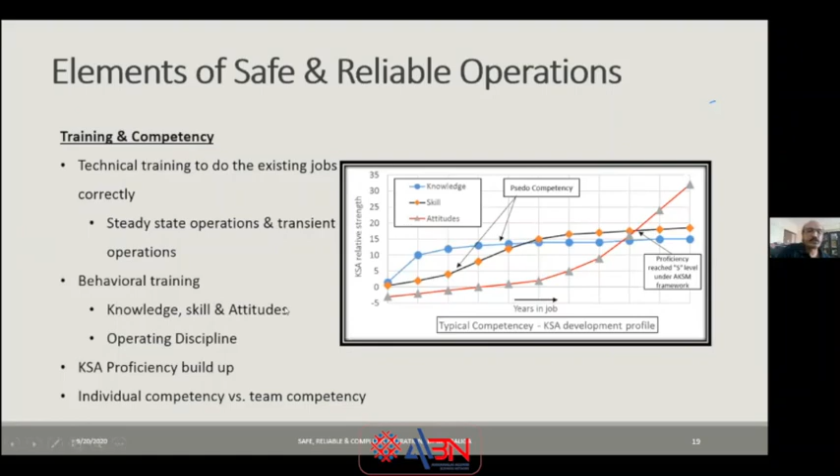The attitude is actually the behaviors, the ability to say exactly what is right and what is wrong, and then ability to tell his bosses and others that what we do is wrong and what is the right thing to be done and how it is to be done. That comes after seeing 2-3 shutdowns and 2-3 startups and running the plants for several years, and he becomes senior enough. Then he makes his own analysis, his own mental model is matured, and that is the time we say a person is competent. That kind of a thing has to happen. Until then, we can't say competency. So competency plays a very big role in our safe operations, actually.

Now, coming to learning from incidents. Actually, incident investigation is basically a learning exercise. You learn from incident, so investigation is not done for fixing the person or fixing the equipment. It is to learn from the mistake and see that it never happens again. But we have found, in my experience, however rigorous your root cause analysis that you do, you end up with repeated incidents.

So where have I learned lessons? I have not learned lessons. I have not learned from incidents. Why my pumps are repeatedly changing? Why I repeatedly have breaker flashovers? Why I repeatedly have seal leaks? Why I repeatedly have heater backfires? Why repeatedly I have a person getting injured by touching the hot surface without gloves? And so many things you can see.

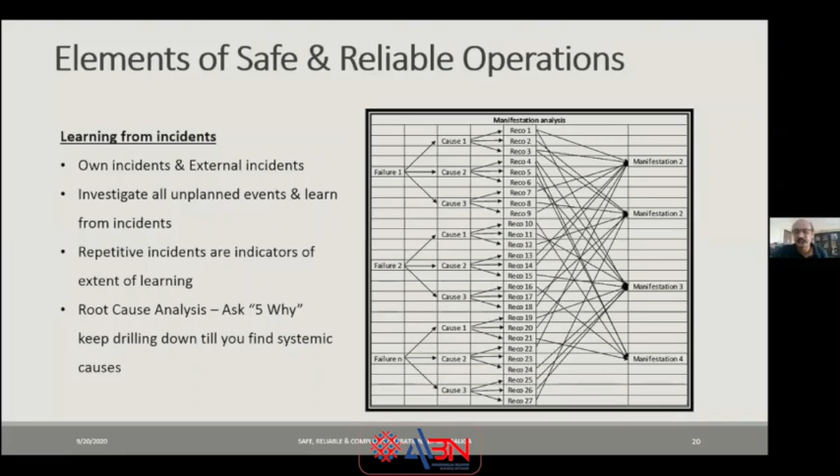Operation and maintenance is another area where it's important. It's highly relevant, and actually safety lies here. Whether you call it workplace safety or process safety, it lies here.

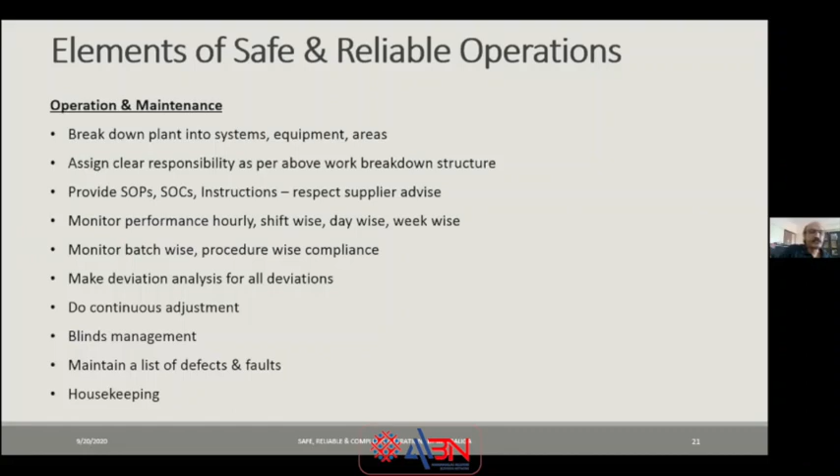How rigorous and good your operation maintenance is determines how good your plant is. Basically, you need good SOPs, very good SOCs or limits, and very good instructions. These three are very important to give to plant people, along with competent people, and your plant is safe. So there are four formulas: have a competent operator, give him SOP, give him SOC, give him daily instructions. Don't allow him to operate his own way, give him instruction in writing. Do this, and you will have a safer operation and maintenance.

One telltale evidence that your plant is in good shape and being operated well is housekeeping. If your housekeeping is good, when I walk into your plant, I see a well-painted, well-illuminated plant, all equipment well tagged with names and numbers well painted and legible. The floor is clean, no water pools, no algae, stormwater channels clean and dry, and the windsock is clean, not stuck up.

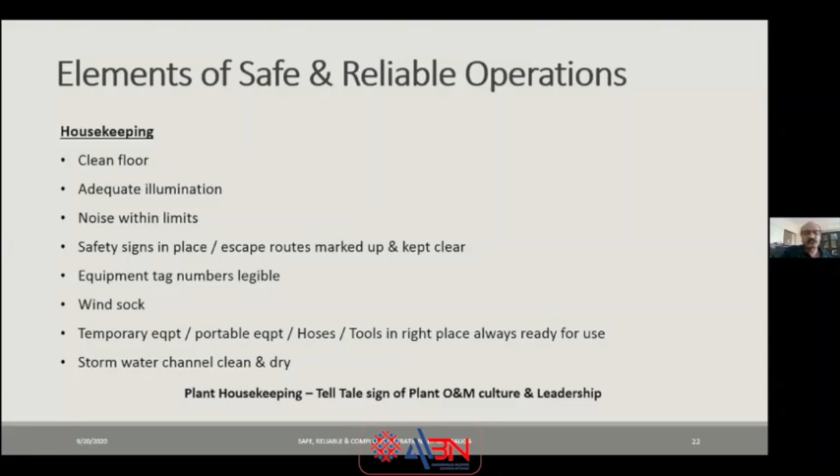Even temporary equipment, portable hoses, portable tools, everything is in the right place, ready to use. It's not a hose that was used, removed and thrown away, but flushed, dried, rolled up, and kept in the exact place - hose number 33 available at hose reel number 4. That's excellent housekeeping, and it tells me you will not likely have a workplace safety incident or a process safety incident, because it's a well taken care of plant.

Change management is another important thing - various technical changes, personnel changes, subtle changes, temporary changes, emergency changes. Technical changes, traditionally industries have given a lot of emphasis and taken care of well through various MOC processes, protocols and systems, well controlled. But there is a tremendous amount of gaps, and a lot of improvement is required from top to bottom in industry today with respect to personnel change, subtle change, and temporary changes.

When temporary changes get too numerous, you start losing control. So please do not have more than a couple of temporary changes in a whole refinery at any given time. Emergency changes show how unwell prepared you are - if you have emergency changes, that means you don't have proper management or leadership.

Today people are talking about business transformation, digital transformation, and integrating refinery with petrochemicals - major changes coming up. Nobody is going to demolish their refinery and build a third generation refinery. They will gradually change over from today's first generation refinery, slowly inching over a period of ten years into a third generation. By the time, someone will come with fourth generation ideas. So managing complex change is a continuous process, and operation people and site people have to be extremely alert on this.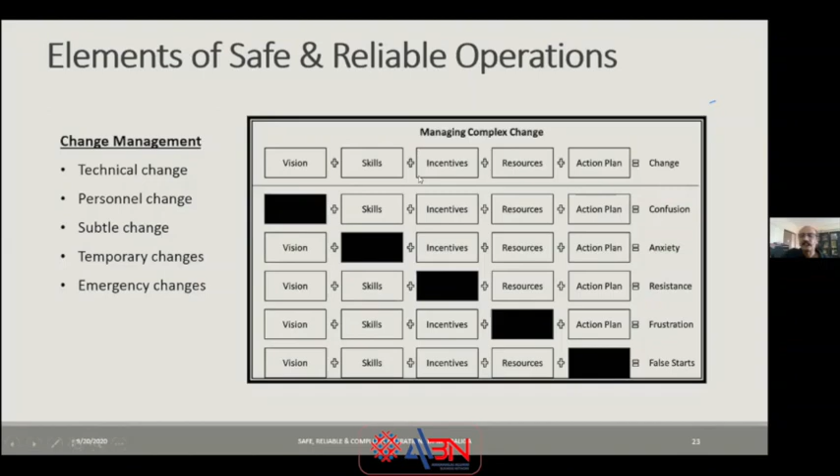Contractor management is very important - contractor safety. Contractors play a big role in our company's operations and maintenance, even services. Here I say contractor is actually a supplier, a bigger domain. So we don't select contractors based on experience and track record alone, but we verify it, and we look at the contractor's personal HR policies and compliance.

A contractor may be extremely competent and may have done great work. But if you look at his HR policies and compliance, and find some gaps and big holes, you better be careful with that contractor, because most likely his past record may not be reproducible in your company.

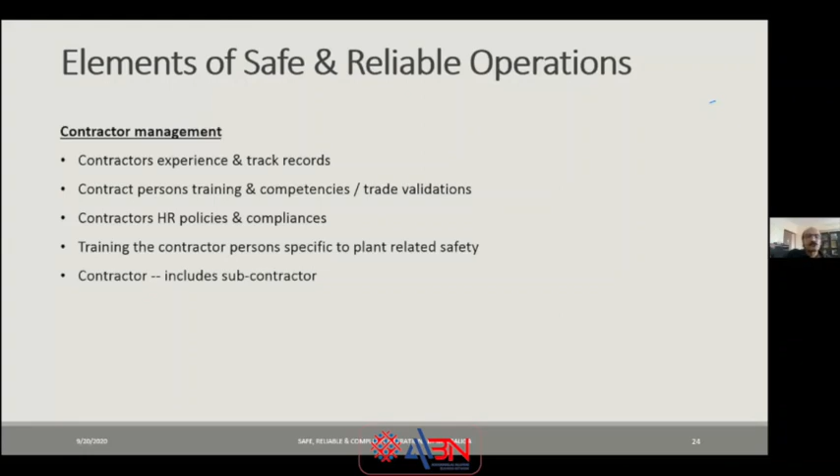So that's very important. And when you say contractor, it is not just the contractor, but we also talk about the subcontractor. How does the contractor manage his subcontractor? Does he have the same attitude towards his subcontractor as you have towards the contractor? That kind of thing. And ultimately, how he is training and keeping his contractor employees competent is very important for you to see.

Shutdown, startup, and PSSR. I think there are so many things that went wrong in Vizag. If they had done a proper PSSR, I think these incidents would have been avoided. Pre-startup safety review - if a plant is under shutdown for 15 days, 1 month, 2 months, please don't restart the plant without a PSSR, pre-startup safety review.

All the level gauges, interlocks, basically tanks and vessel levels, are very, very important. They are notoriously going to fail. And some flow meters may not work, and then you may be thinking you are pumping 100 cubic meters, but it could be even 1,000 cubic meters, and then there may be an overflow.

The risk assessment is required separately. Don't depend on your old existing risk assessment. Risk assessment for startup-shutdown scenarios is completely different, and you need a special risk assessment to be done for a startup.

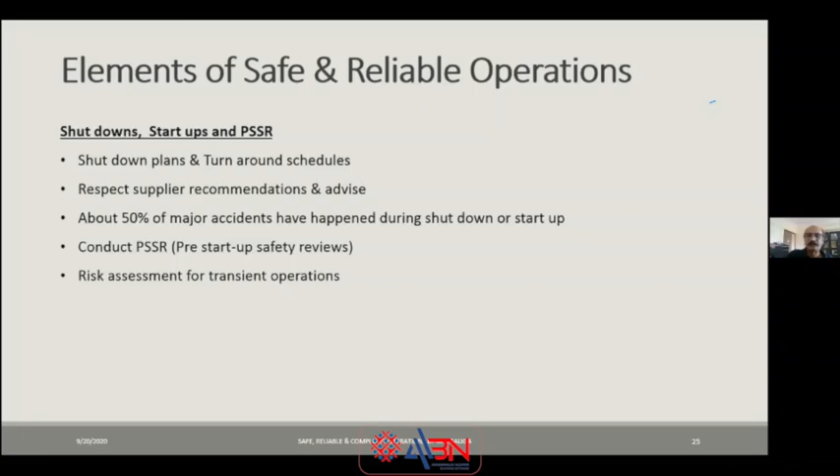Corrosion and fouling is another very, very important aspect vis-a-vis process safety management and safe, reliable operations. Internal corrosion - I mean the process fluids, metallurgies, and how you manage the process flow diagram. There may be no corrosion; metallurgists may say there's no corrosion likely because the plant was designed with titanium grade B, monel, or hastelloy. But what type of, how you are managing your process, how often chlorides are slipping, how properly your chloride treaters are regenerated, how you operate the plant - this can actually kill your plant.

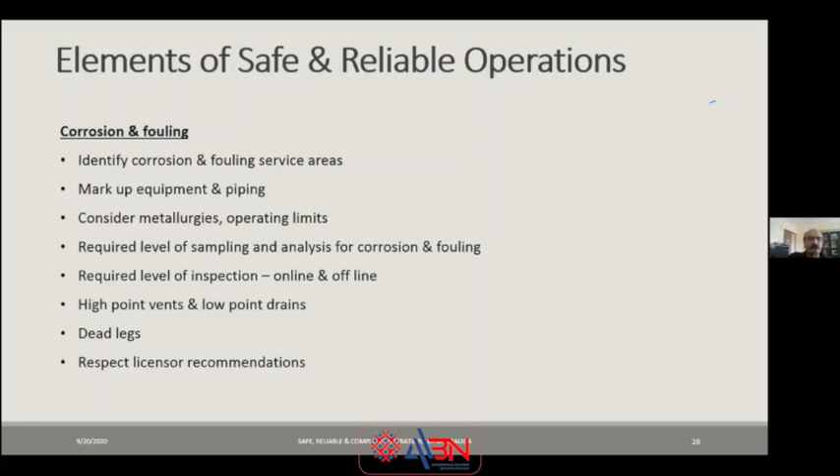So identify the corrosion and fouling service areas, mark them on the equipment, maybe map them in the field itself, identify high corrosion areas, etc. And identify high point vents and drains where water, chloride, or acidic material can stagnate and corrode, dead legs where a lot of corrosive material can stand, etc. Above all, when you make your corrosion manuals or operating manuals, respect the licensors' and vendors' recommendations and suggestions, and make sure they are incorporated.

External corrosion and damage - several times leaks have happened because of external corrosion. That's a very clear sign of poor housekeeping or maintenance practices or cost-cutting measures. So you need to watch out for it, and see how your piping and equipment supports are holding. Paints, insulation - insulation is a big part. How you maintain your insulation matters. If you don't maintain it well, water gets into it during the rainy season or at night, moisture gets in, and it starts corroding inside. Small bore pipings and instrument tubings are all various areas where hazards can start.

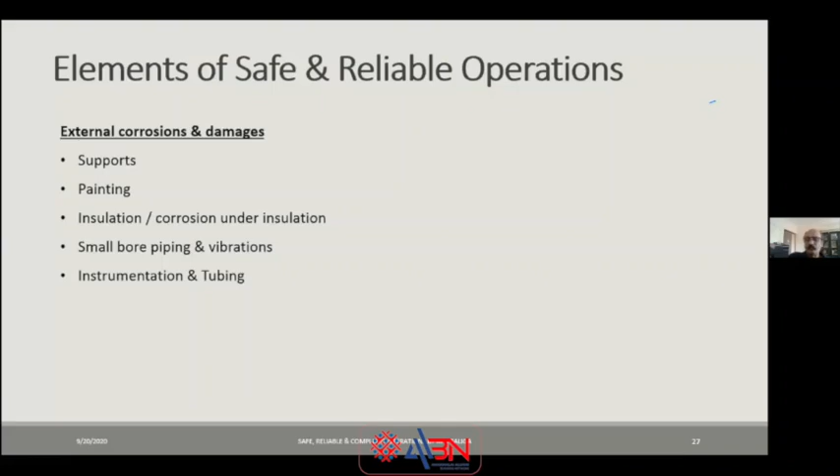Process hazard analysis, risk management, and ERCPs - emergency response and continuity plans - are very important. What-if studies: there are certain places HAZOP helps, certain places HAZID helps, some places what-if helps. So you need to identify what helps where, and apply that particular technique to identify your hazards, do a baseline study, and then do repetitive studies, continuously being cautious and keeping an eye on your hazards.

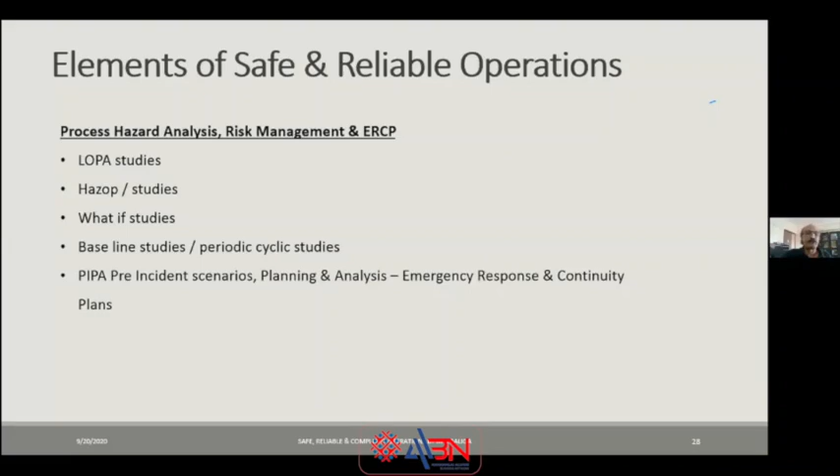Finally, automation, digitization, robotics - no presentation will be complete if you don't talk about it these days. Everything is digitization, robotics, automation, Industry 4.0, predictive analytics, and there are a lot of opportunities for safe and reliable operations in applying these technologies.

And it's not something new we are talking about, it's already happened. 5-6 years back itself, people started applying robotics, drones for inspection of flare tips, etc. But here I am more excited about digitizing plant data, equipment data, and then modeling and creating digital twins, or physical twins, or replicating models which can actually predict impending failures.

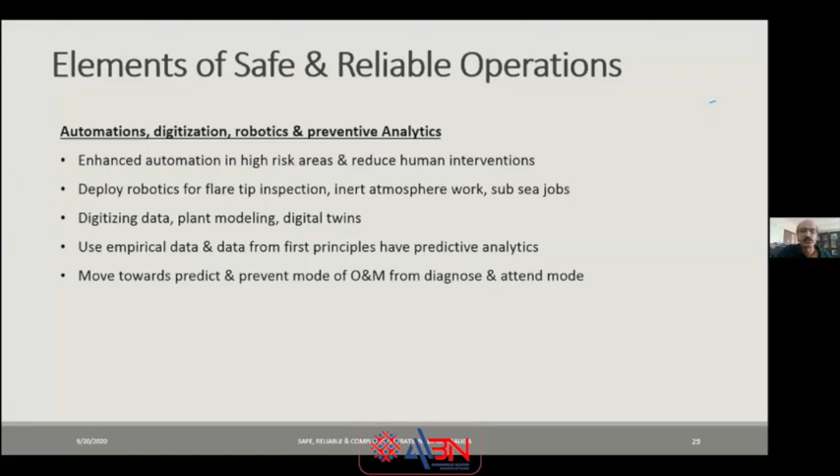Use your empirical data and simple statistical models - 1 sigma, 2 sigma standard deviations, CPK analysis, PPK analysis - things like that are even enough. If you have today's generation digital technologies, you can have a prediction of when the failure is going to happen, and before that you can do predictive maintenance and come back.

And finally, last but not the least, I have been talking a lot about leadership and culture in safe and reliable operations - very, very important. I think this is the one-stop solution: if you have a good leadership attitude, everything comes into place. All the elements I talked about earlier will automatically come if you have very good leadership in place.

So it takes a holistic vision for the plant and strategies to work out - have 5-year, 3-year plans, and then an annual plan, then get it down to quarterly, daily, shift-wise plans.

Field leadership is walk the talk. Most of the time leaders talk about safety, environment, etc. But mind you, operators and contract labor, everybody is seeing your behavior and what your actions are, and that tells them more than what you told in the meeting, in the toolbox talk, or the town hall topic, or a circular. All that has no meaning to them, but they will continuously watch you.

It's called felt leadership. Then have proper role definitions, define roles and responsibilities, and see that people are made competent to perform their roles and responsibilities. Then have proper contracting strategies and respect for environment.

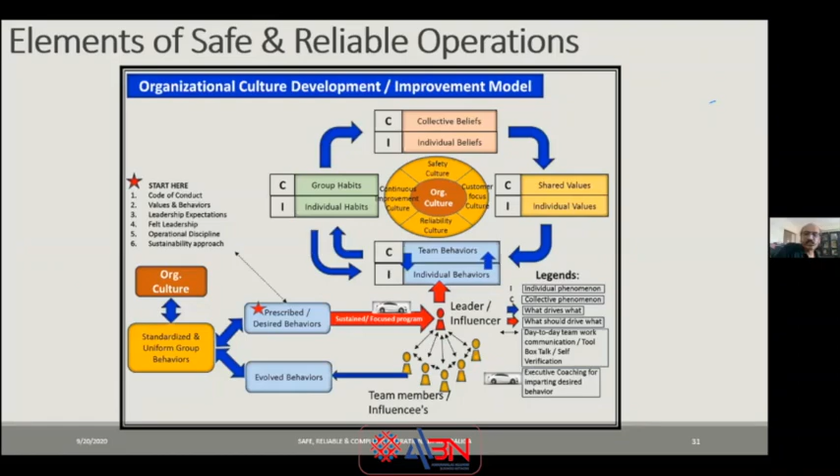In any plant or shift, there is a leader, an influencer. He is not the official leader; the shift superintendent is not the leader. There is a leader, you will know him. You need to get hold of him and then use him to influence the others. So you need to influence through him. There are various methods through which a desired behavior can be inculcated into the leader or influencer, who in turn influences the others, and then gets into the vicious cycle, and then you wait for 1-2 years. But you do it very, very persistently, with perseverance, and rigorously. That's how you get to your desired culture.

So final slide, my dear friends: what is the evidence of safe, reliable operation? I told you about a lot of elements required for safe and reliable operation, but what is the evidence required? The evidence is ultimately the lagging parameters I talked about. There are hundreds of leading parameters you need to track on a shift, day, week, month basis. But ultimately, as an outsider, I will know if a plant is safe or reliable by looking at their fatalities being 0, lost working cases being 0, medical treatment cases being 0, or at least year by year a continuously reducing trend.

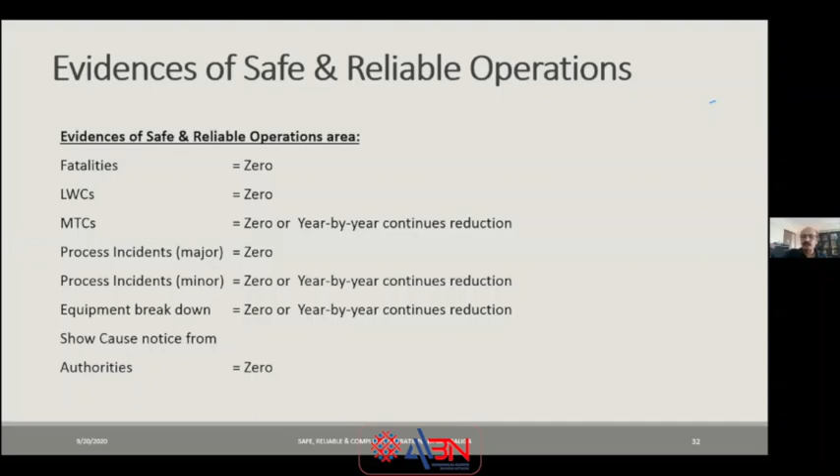Major process safety incidents should be zero, minor ones should be zero, or at least show a year-by-year reducing trend. Equipment breakdowns should also show a reducing trend. And ultimately, from your GPCB, MPCB, or TNPCB, you should not have any authorities giving you a show cause notice. That should be zero, it must be zero. There's no reducing trend allowed here, because if a show cause notice is given a second time, they may shut down your plant. So it's very important, these are the evidences. Please look for these evidences, look for the last 2-3 years of data, and you'll know what is the status of your safe and reliable operations. So this is what I have, my dear friends.

And Tariq Saab, back to you.